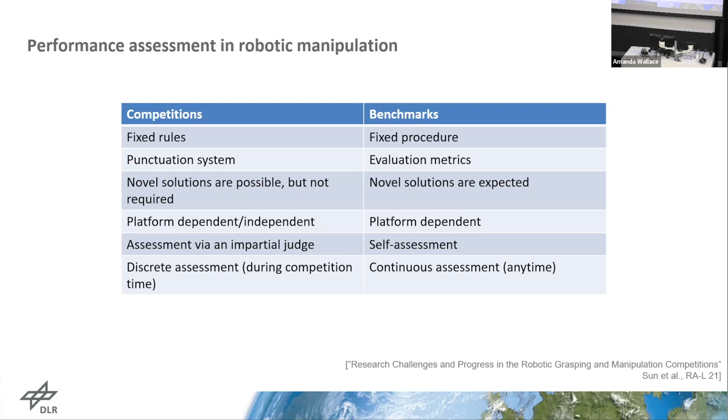This is a table we published in a paper on RAL last year, which summarizes some existing competitions involving robotic manipulation. Most of them use a fixed set of tasks for the competition design, which has the advantage of creating interesting scenarios that allow progress to be measured objectively based on task performance. Competitions are crucial to the community, and some have been very influential for developing certain applications, for instance in logistics scenarios.

Benchmarks in terms of robotic manipulation can be classified into three levels. At the mechanism level, we measure the intrinsic capability of the mechanisms, mainly the hand or gripper, such as robustness and resilience, or mechanical properties like fingertip force or gripping force. At the algorithmic level, we evaluate a specific part of the manipulation pipeline, such as grasp planning, motion planning for the full arm, or object recognition and pose estimation.

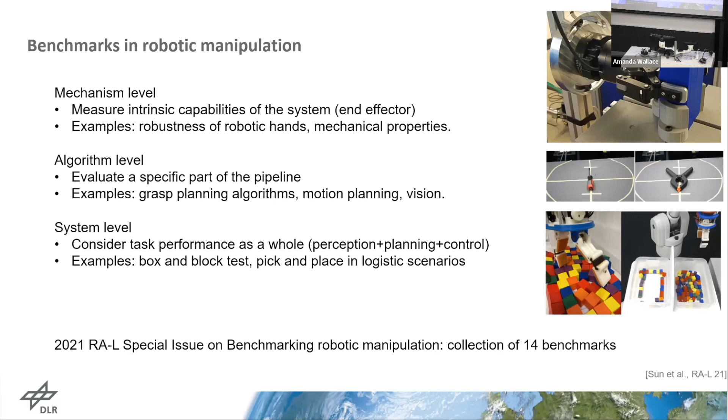A nice summary of many benchmarks proposed for manipulation appears in the special issue in 2021 on robotic manipulation. This is a collection of 14 different benchmarks, for instance for bimanual manipulation, in-hand manipulation, or grasp planning algorithms. I encourage you to take a look at these papers and see how you can use these benchmarks to measure progress in your research.

Today I wanted to present how we use benchmarks for the evolution of the design of the clash hand. Let me start by showing this video.

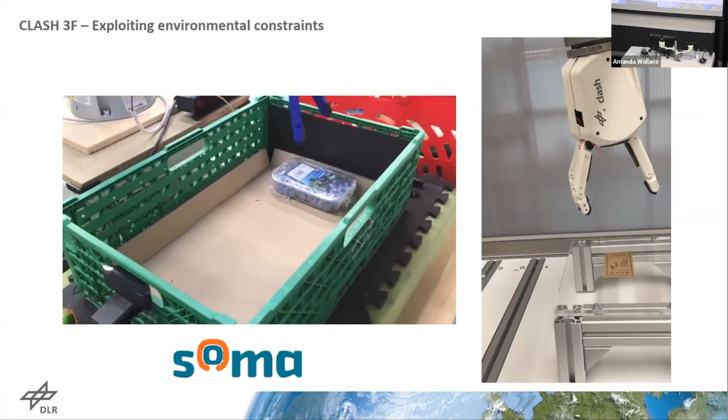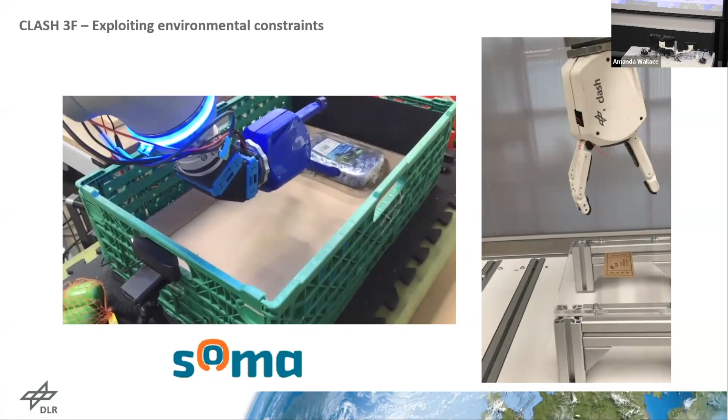This is an example of the ideas we had in this project, SOMA, which stands for soft manipulation. We worked with different partners, mainly Ocado Technology in the UK. The idea was to develop an end effector that could exploit what we call environmental constraints, meaning explicitly exploiting contacts with the environment to guide manipulation actions or to grasp difficult objects.

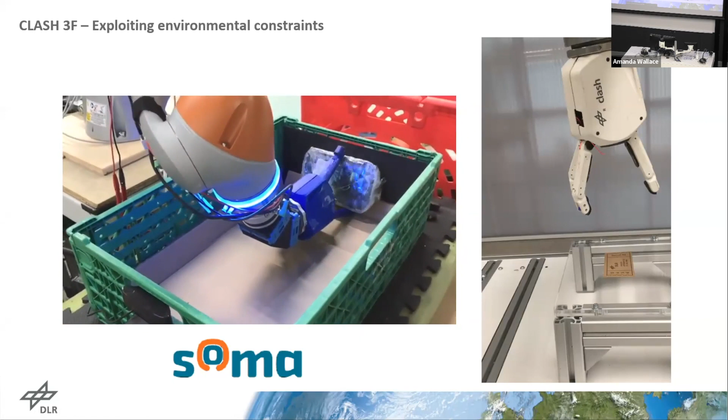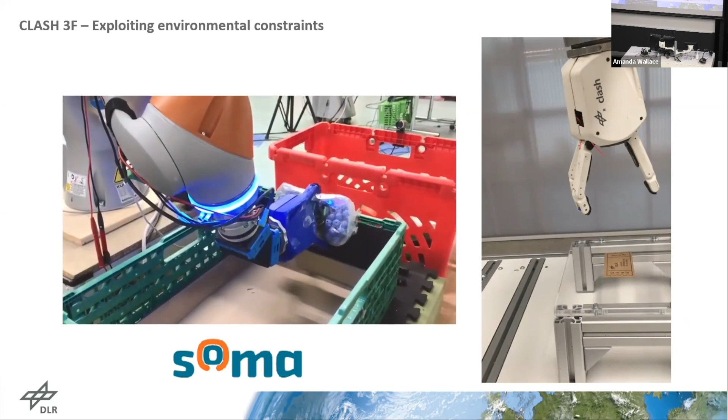In this slide we see two of these constraints. The one you're looking at right now is what we call the wall grasp, meaning we push the object against the side of the container to grasp the punnet in this case. On the right side, we have what we call the edge grasp. For grasping a thin object like this ticket or business card, the hand slides the object towards one of the edges and then grasps the ticket.

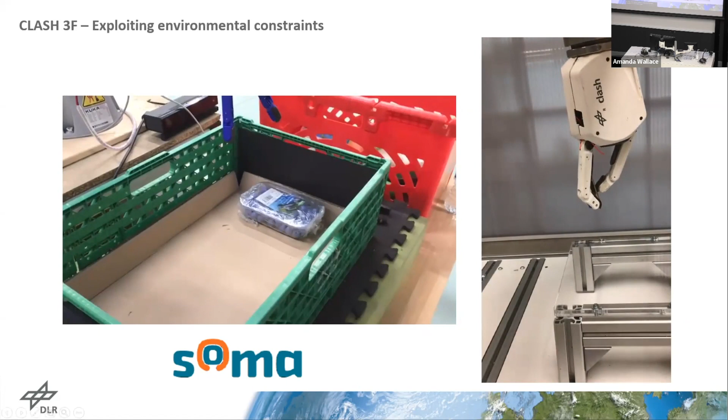So this was a couple of examples of the application of the clash hand. Let me show you quickly how the hand is constructed. Clash stands for compliant, low-cost, antagonistic servo hand. The design follows the idea of embedding variable stiffness actuation into a robotic end effector.

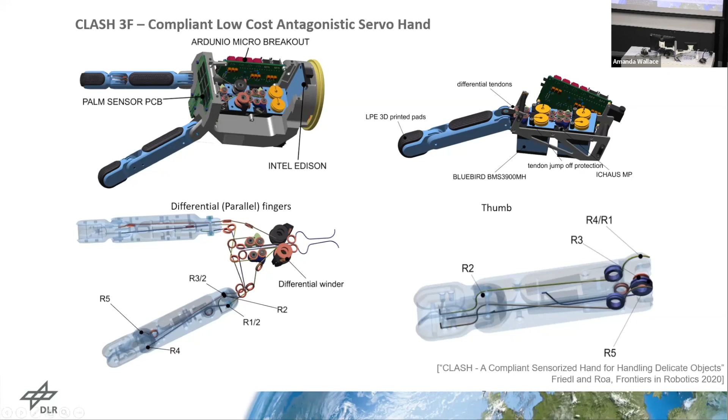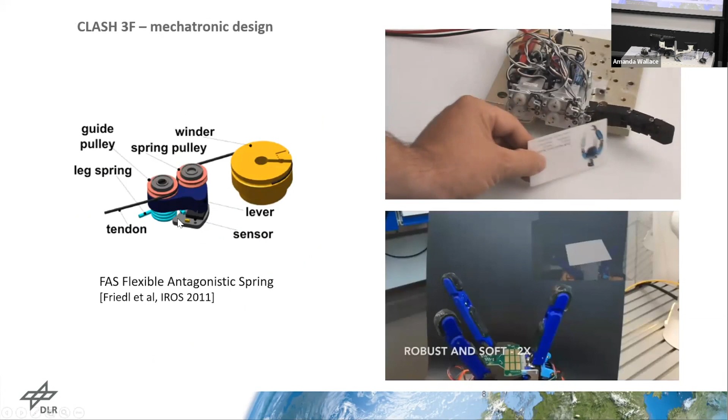Now, here you see how this variable stiffness is implemented with what we call the flexible antagonistic spring, or FAS, system. And this enables a very high sensitivity of the hand, as you see in this video. So this is a normal business card, and you see that as soon as we touch the card, the fingers try to wrap around the object to increase the number of contact points with it.

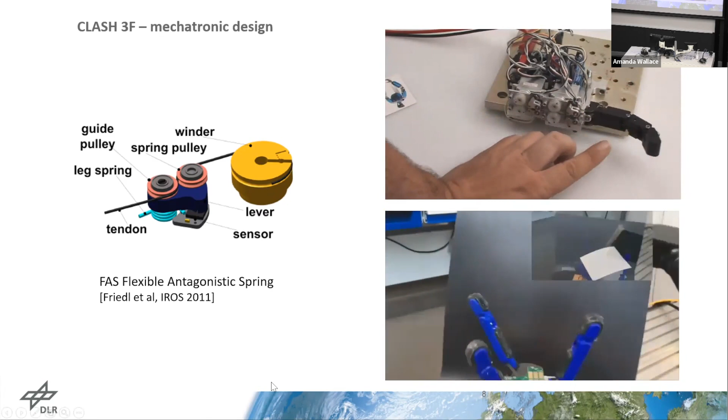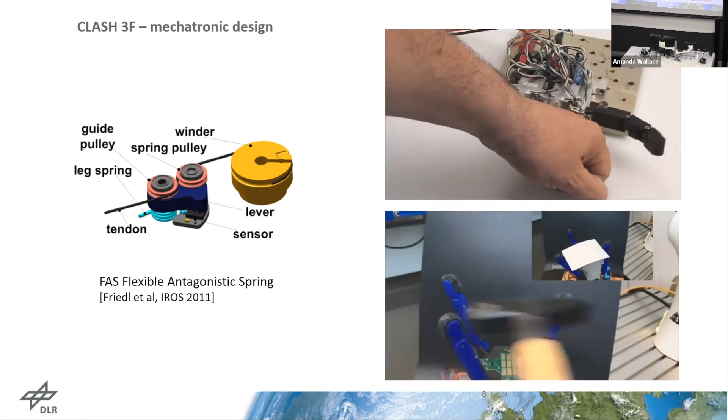And then we tested the robustness in a bit of a savage way. So having a hammer and then hammering the fingers and seeing if the hand was actually functional afterwards. And well, luckily we did an evolution of this test that you will see in a moment.

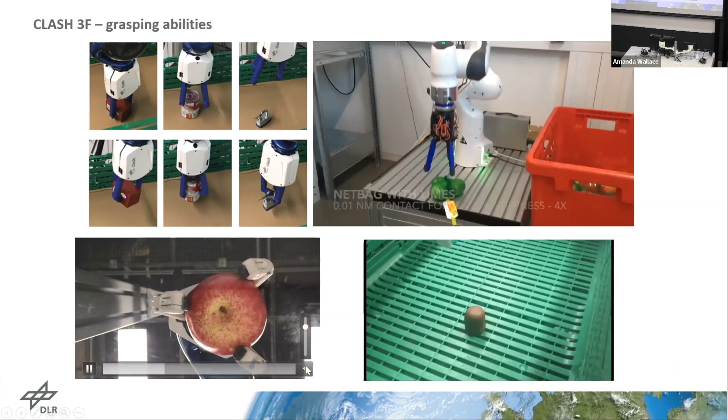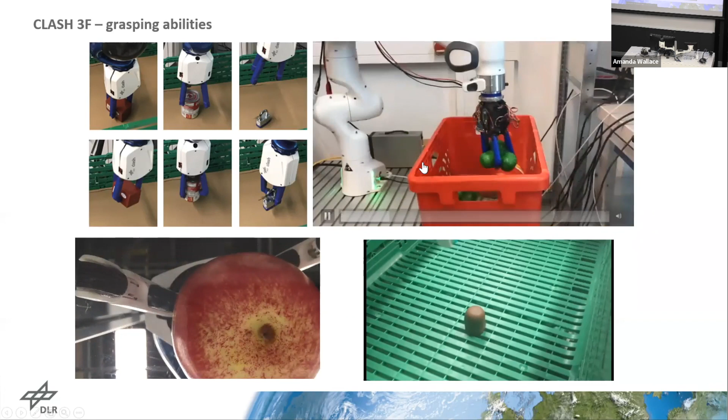In this slide, I just want to show you some snapshots of the performance of the hand. So here we can grasp a very large variety of objects. You see here some objects from the YCB database, and in the video on the top right, different objects using some combination of these primitive motions that I described before.

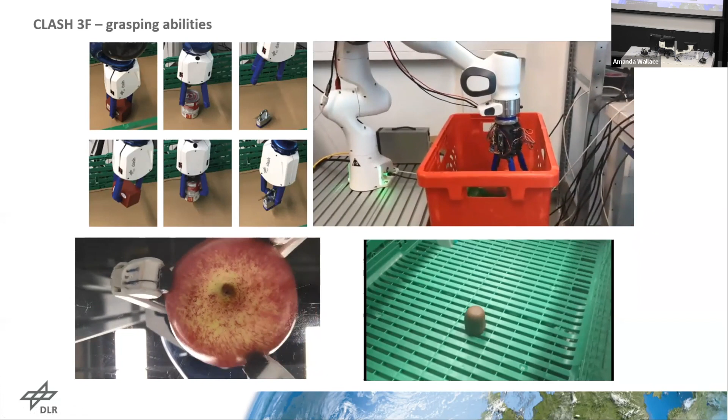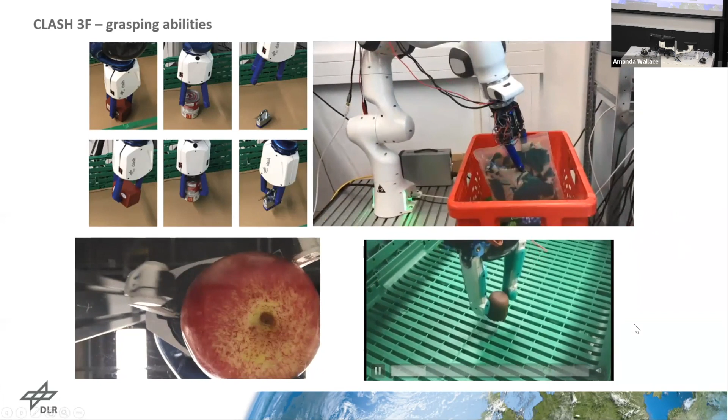So a net of limes or this plastic bag with salad. And here on the bottom, you see, for instance, grasping one whipped cookie. So we can also apply grasps with very low forces to avoid destroying such delicate objects.

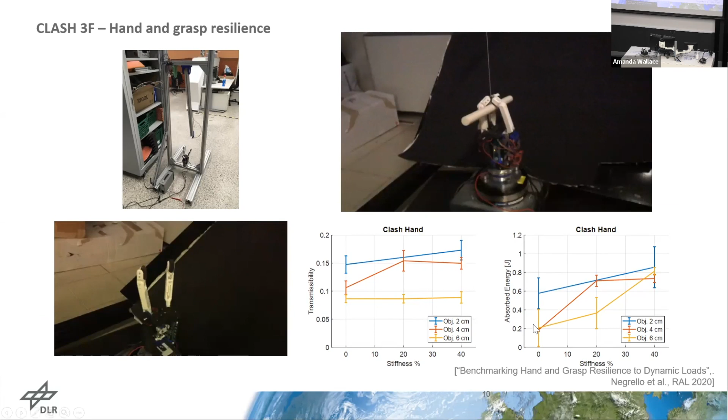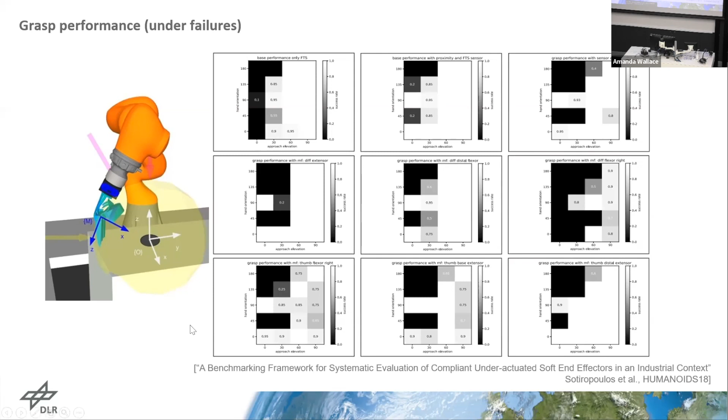So we verify as well if a tendon is broken by increasing the passive stiffness of the system, and then we compare this stiffness with the nominal value and the real spring deflection. The servos can also be checked by measuring if the commanded and real positions match within an allowed threshold. And we also check the grasp success.

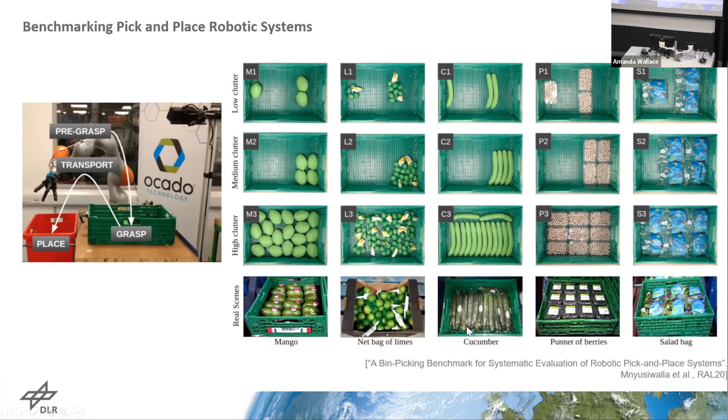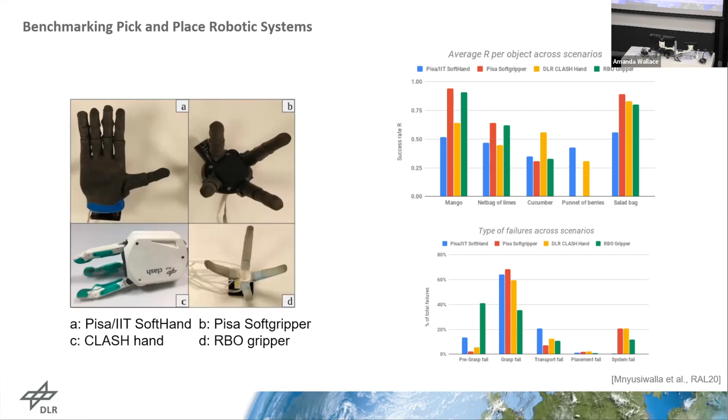There were also some interesting things with this benchmark. For instance, none of the systems we tested was capable of solving the high clutter scenario. There are different reasons for this, but basically solving these very cluttered scenes for the logistic domain requires a combination of different factors. One of them is vision—we saw that learning-based solutions are very good for detecting instances of objects in the medium and low clutter scenarios, but several state-of-the-art algorithms cannot detect all the objects in the crate. So they can detect some of them, but obviously if you didn't detect all the objects, you cannot grasp all of them. This was an interesting finding from this benchmark.

So the idea here is, of course, we need a better vision system, and we have been exploring different state-of-the-art solutions, even commercial solutions. There are some solutions we've discovered in the last months that can deal with these types of scenarios. However, there are very challenging things like these salad bags, where differentiating where one bag finishes and the other starts is kind of tricky.

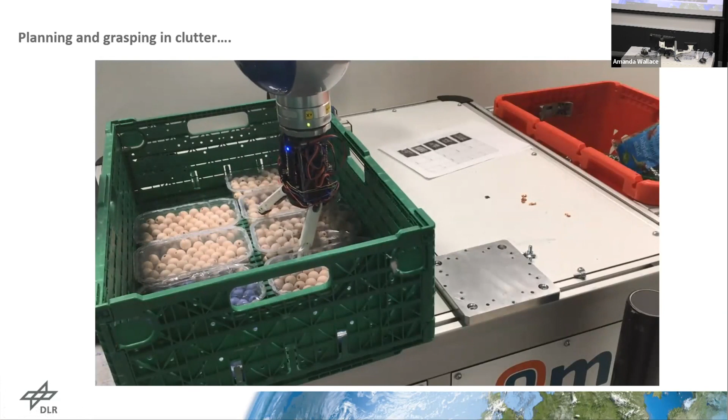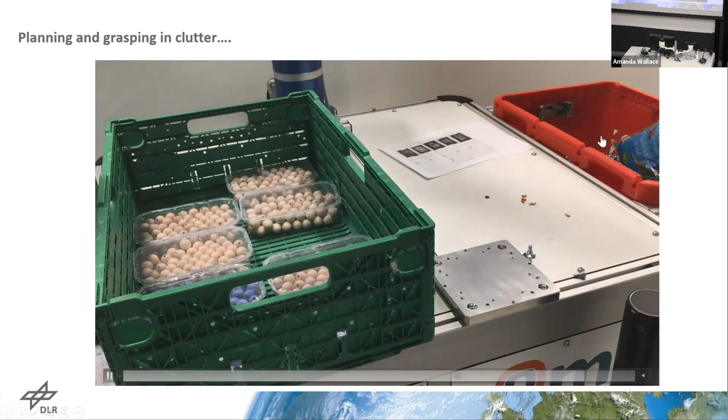For these high clutter scenarios, you can come up with handcrafted strategies like the one you're looking at in this video, where you introduce the finger into one of the holes between the punnets, then slide the finger along the edge of the punnet. You try to lift it, the punnet turns 90 degrees, and then you can grasp the punnet and put it away. So you can do these kinds of things, but the goal is to do this in a systematic way with an automated pipeline.

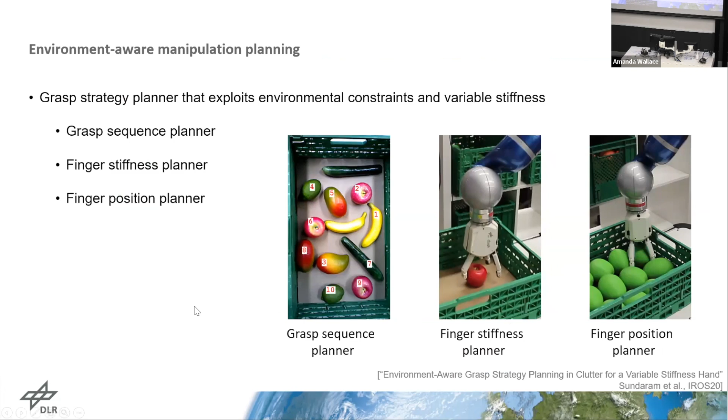So we created this—we worked on what we called environment-aware manipulation planning, which is a combination of different things. We combine a grasp sequence planner that identifies which objects are easier to grasp in a given scenario, a finger stiffness planner that exploits the capability of having variable stiffness on the hand, and a finger position planner that adjusts the finger position for very cluttered scenes where there are very limited free spaces around the object.

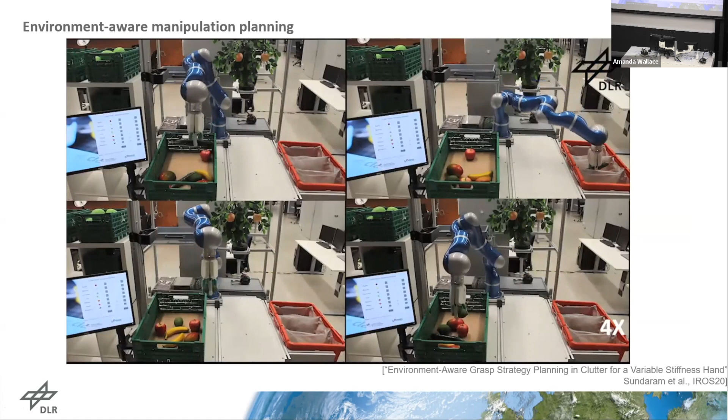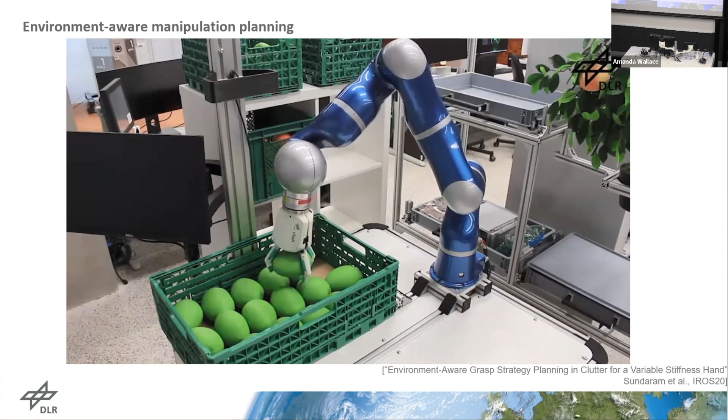We implemented this, and here you can see—perhaps let me just skip to the final slide—how the system performs in different scenarios with different objects. The system actually performed quite well, but we also want to move towards a more generic solution. We still feel the implementation we have is very suited for the type of scenarios in the benchmark, and we want to move now to more generic scenes. However, let me conclude with one more iteration on these benchmarks.

So for these highly cluttered scenes, we saw that having tactile information at the fingertips is really essential. So we started to play with different tactile sensors, resistive sensors, time of flight sensors that could be fitted to the fingertip, and try to use them for solving these scenarios.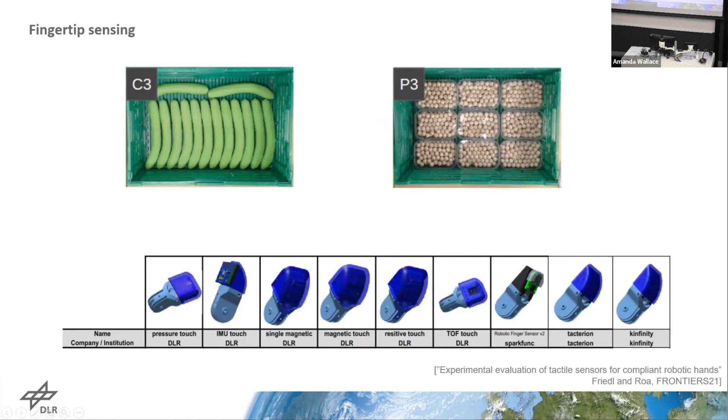We implemented this for this scenario, for instance, the cucumber. We adopted a different vision pipeline here, just a watershed vision algorithm for detecting individually each one of the cucumbers. And with the information coming from the fingertips, we could detect things like when the cucumber is rotating inside the gripper, so that you can consider this in the transportation phase to avoid dropping the object in the meantime.

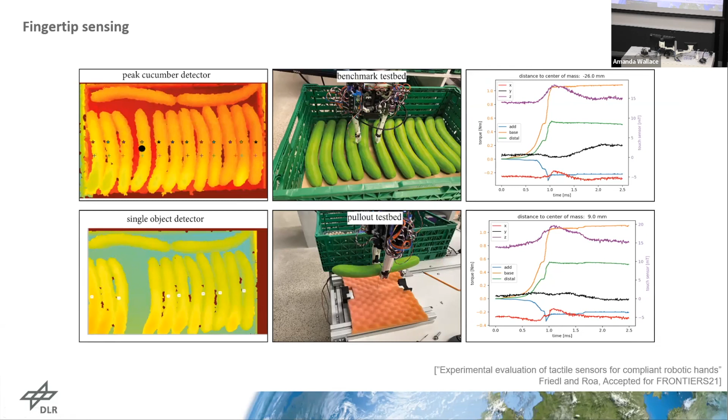With this video, I want to show you one of the topics that we are actively working on: how to enable the system to automatically recognize these errors that happen when you are executing one action. So I'll play this again.

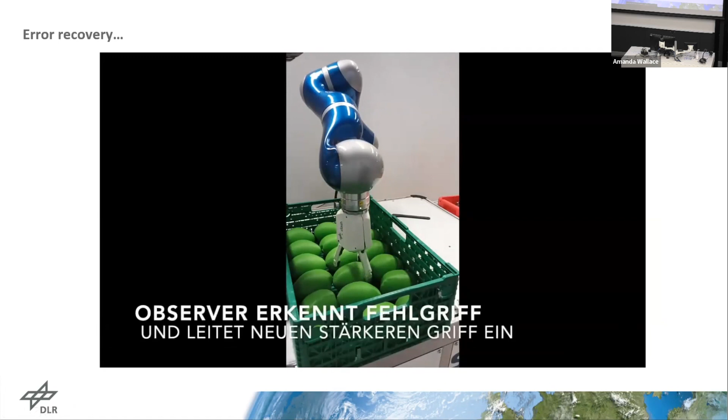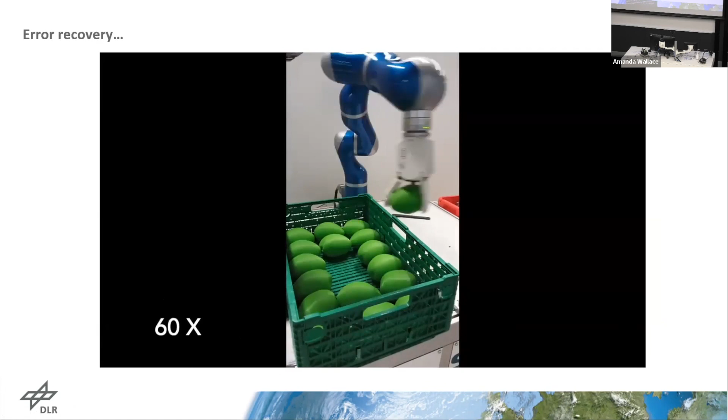For instance, here, this is a simple example. We try to grasp the object, it slides because the stiffness that we set was too low, and then it tries again, adjusts the stiffness, and then it succeeds. And with this kind of approach, we could actually solve this challenge of emptying the bin, basically.

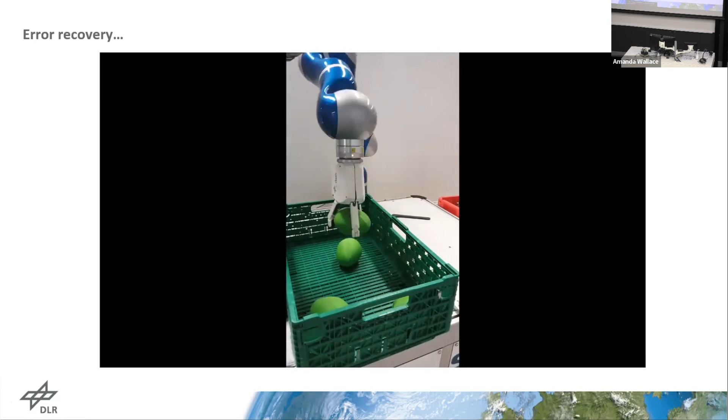So if this is a topic of interest for you, I would love to exchange ideas about this. This is really a key topic for us right now. Good.

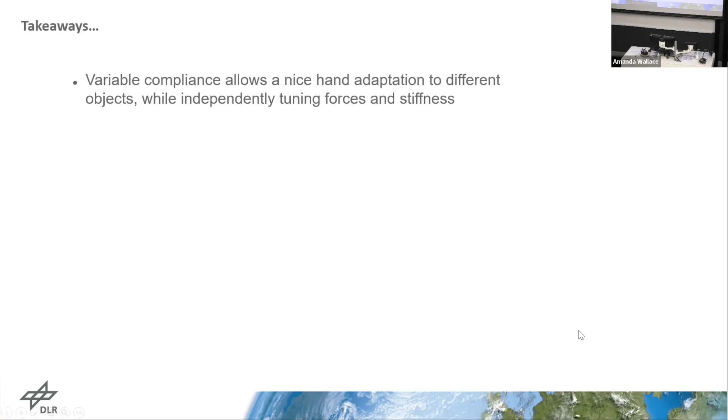So let me conclude the talk with some takeaway messages. One, variable compliance allows a very nice adaptation of the hand to different objects. And in the CLASH hand in particular, we can independently tune the forces and stiffness without changing the fingertip position, which is an advantage of the mechanism that we implemented on the CLASH hand.

Then we use a variety of benchmarking protocols that actually help us to improve the design, and we are still actively using them in two new European projects that we just started, following up on this idea of improving the performance in logistic scenarios, both in the fruits and vegetables case and also with deformable objects nowadays.

Then we have, of course, this combination of sensing and manipulation planning that helps us to solve this challenging scenario, the benchmark. And there are still some different points that are open on our side to obtain a generic manipulation system, even for the solution of this system level benchmark that we were using as a guideline for this development that we had.

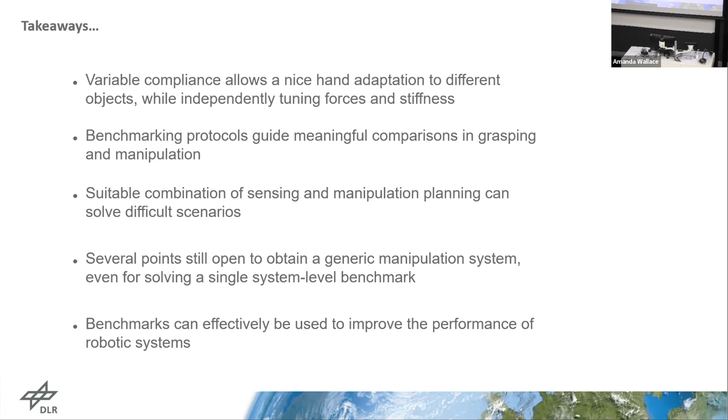Anyways, at the end, we definitely think that benchmarks are an effective tool to improve the performance of robotic systems. And as mentioned before, I encourage you to take a look at already published benchmarks and try to use them for advancing your work. With that, I conclude my presentation.